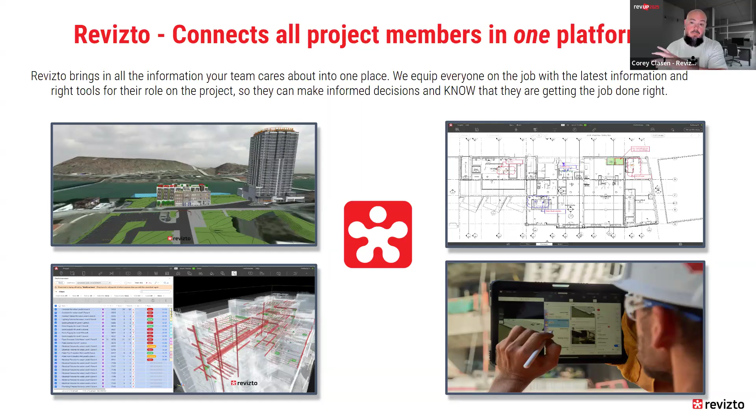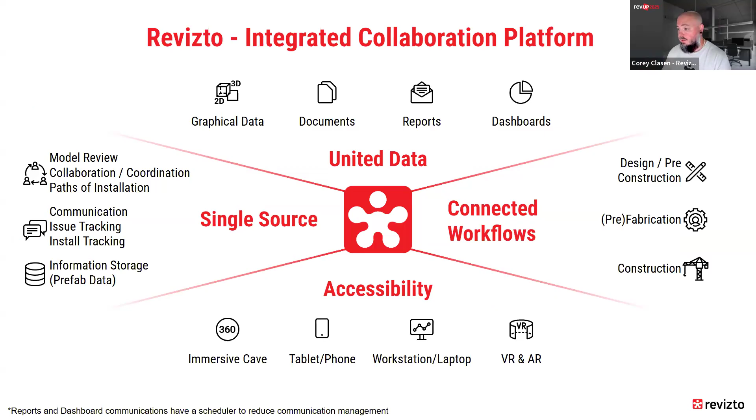All right, moving on. What is Revizto? Just a quick introduction for anybody who's not familiar. We are one platform that connects all project members into one platform: 2D drawings, 3D models, clash detection, field mobile apps. We're not just a BIM tool, we're a field tool as well. We play really well in that space and break down the barriers between your tech savvy folks and people who may not be so tech savvy, giving them an easy platform to use. We take all kinds of file types—we're software agnostic, meaning pretty much any software used for BIM and 3D construction right now, from an authoring side or even scans, we can accept and work with. As a holistic overview of where we fit into all of this: united data, single source, connected workflows, and accessibility. That's Revizto from an extremely high level.

And then Adam, if you want to run us through the high level of what Evolve is and what you guys are doing. Yeah, thanks. So pretty basic what Evolve is: we are a software company focused on the MEP trades. We started in 2018. Like I said, I'm an electrician by trade—I came out of the industry and started with Evolve as their electrical SME product manager.

We worked under the Applied Software umbrella, which was an Autodesk reseller. Around that time, we saw a significant gap in the trades as it related to the design process in Revit. A lot of people were still transitioning to Revit around that time. Some were early adopters, some not so much.

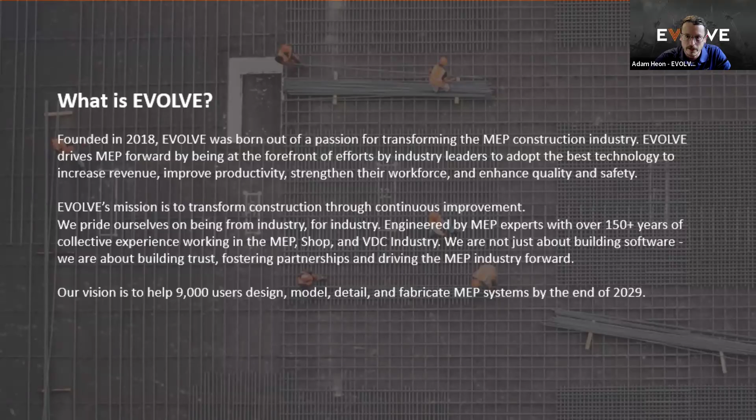So we saw the need, and basically what we did is we hit the road and traveled company to company across the country and talked to you guys and said, what are your problems and how can we help? And that's how we started. We just started solving problems based on what people were telling us.

Over the years, we grew. We've grown 30% year over year since then. Applied Software was acquired by Graitec, and Evolve broke out as our own company just a few years ago. So new endeavor at that point.

And yeah, so we have four basic products that are on the market: Evolve Electrical, which we'll be talking about today. Then we have our mechanical version focused on M&P. And then recently we've launched our Evolve Shop product. So we're kind of trying to be more holistic and not be just a point solution in Revit, but really do the end to end from design, fabrication to eventually field. So the shop product is kind of the next step for us.

360 Sync document management software. It's more heavily on the project management side of things, synchronizing things like Procore, ACC, could be Dropbox, Bluebeam, basically just document management. I think there's like 20 something integrations we have there.

And then also recently we launched our campaign, which we're calling VDC OS, which is just our web development side of things, focused on the VDC side of things. We're pushing out things like usage analytics, productivity measurements, various things like that, that basically enhance the VDC and help manage the VDC as a department. That's not necessarily just focused on the Revit environment. So yeah, that's basically a good overview of us.

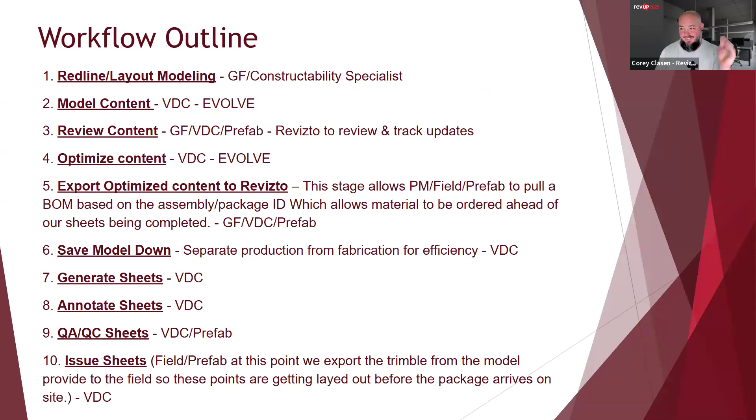Awesome. I advanced too soon on that one, but we're gonna go back and there you go. Made it right. Okay. All right.

So let's talk first about how does this whole thing begin, Matt? Like how do you guys get from starting point 0? What are you guys doing? Yeah, I'll let Adam go ahead and speak about the initial configuration, because this part is a critical piece. The very first step is how to configure Evolve.

Yeah, so this is an important part for us as well. This is critical for all Evolve users: understanding what needs to be set up, what's configurable, that type of thing. Like I said, we traveled across the country and talked to all kinds of companies, and everybody has a basic way of doing things. We're all building buildings, but there are always these nuances where your expertise lies, skill levels are different, company structures are different. So Evolve in general is very customizable. It can do a lot of different things.

But to what Matt's saying, getting that right setup is critical. So things like sheet setup, understanding your Revit standards, what view templates you use, what those outputs look like, what your schedules look like. Especially when you're talking about spooling and sheet creation, you have to establish those standards early on so that when you click that easy button, the output is what you want it to be.

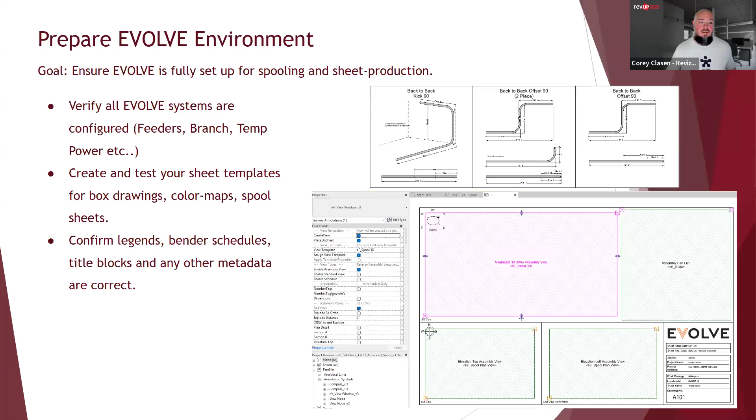All right, so we've got everything set up, we've had the conversations. Now what are we doing, Matt? Yeah, this is a basic concept that a lot of ECs, or even other contractors, are probably doing: once you have everything configured, you export your conduit run information schedule from Evolve, and then we mark it up in Bluebeam or whatever, do our layout, and embed our metadata to match the parameters of the spreadsheet,

so that when the constructability specialist finishes the layout, they embed the metadata that will then get imported. We export the CSV from Bluebeam, and then we import that directly into Evolve. So as you're modeling the content and you're finished modeling, you would then assign that metadata, or that BIM data, to each conduit.

Why is that? One of the things that I love about Evolve in this aspect is, we all kind of go through, you lay out this pretty conduit, you got everything routed and everything looks great. You go to coordination, and then, as an EC, I feel like we move a lot more than other trades. I might be biased, but at that point, you're then splicing, cutting, adding offsets, removing that BIM data.

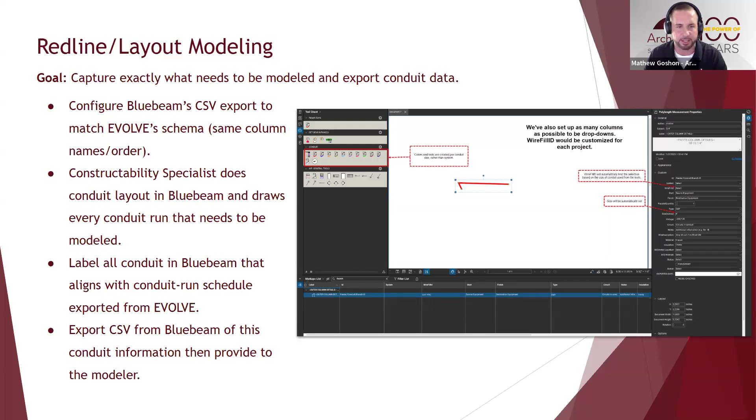Yes, sir. So we've got your parallel quantities, your to, your from, your sizes, your material, if it's EMT, RMC. That information is given to the modeler on the front end, which allows the constructability person to hold the modeler accountable, but it also helps the modeler to understand without having numerous questions or Teams calls. They have all the data they need on the front end to be successful. Yeah. All right, cool. Thanks, Matt.

All right. So then from there, we're going to model red lines. Yes, sir. So a lot of people, when they think of Evolve, they think it's a prefab and spooling tool, which would be correct, but it also has other tools that allow you to be more efficient in other aspects besides just spooling. One of those would be the modeling. I'll show the two examples right here.

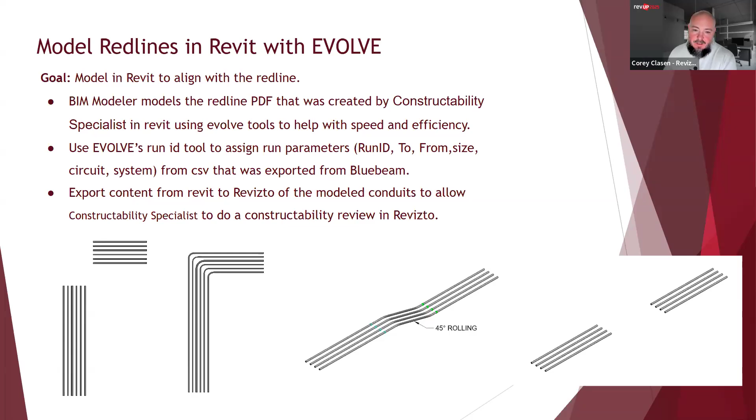Yes, sir. All right, so now we got everything modeled, right? Now we're starting to talk about constructability review. Who's involved at this step, and why is this so important for you guys? Yeah, first off, I'm gonna go through the process, but really, we all know as a modeler, it's your job to QA/QC your own work first, obviously.

So I'm not gonna go through that process because we all should be checking our own content before we say it's ready to be reviewed. So once it's ready to be reviewed and you've told the constructability specialist, basically, they're gonna go ahead and we're pushing this content to Revizto.

So if I want a clash to go automatically, every clash should go to this person, and then this BIM manager is going to assign it to his team to resolve the clashes. Well, you can set on the stamp that this type of issue will automatically be assigned to this user. We'll add these 5 watchers because they might not be the person that are fixing the problem, but they need to have visibility to be aware that there is a problem out there.

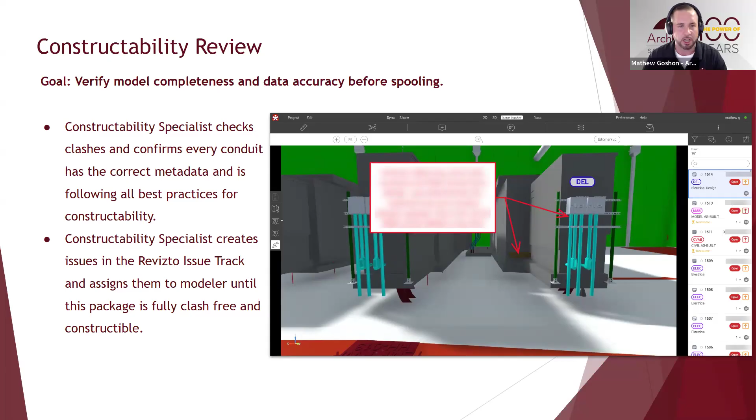But then you're correct. Once you get to the modeling, it might be buildable, but that doesn't mean it's the best solution for prefab, or it makes the most sense in saving labor hours in the field. So that constructability specialist is an expert in the field that then understands the BIM tools and workflows to allow us to get it right the first time. Very cool. Makes sense.

All right, so now we've done the review. We're all good to go. We've got sign off, buy-in. Now we're gonna optimize. Yes, sir. So what is spooling to me? Well, spooling is basically, when you model content in Revit, you might have a straight that's 500 feet. Well, that is not the information we want to be able to have. Evolve has allowed adding couplings.

So we might have a run, and then you will optimize that run and add couplings or unions, however they call it. Then you're taking that stick of conduit that really can't be purchased from anywhere, and you're breaking it down to a bill of material where you can say, I know I need five 10-foot sticks or whatever. And you start seeing the real prefab materials that allow everyone to understand the quantities and everything related to it. So that's kind of what the spooling is.

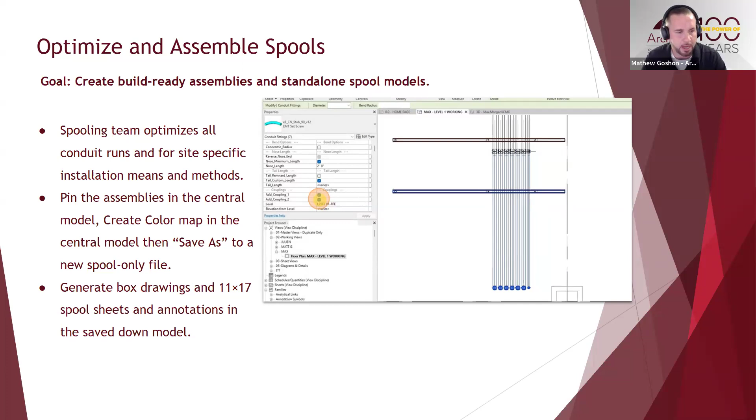You're taking Revit content and breaking it down to actually being able to utilize that information further in the prefab or in the field. One thing that's been a lesson learned is just understanding you might be spooling overhead, and let's say you're spooling EMT. Well, when it comes to spooling RMC, there's different ways, because when you're spooling RMC, the coupling comes as part of that 10-foot stick, it's all one piece. On a 10-foot stick of EMT, it's actually 10 foot.

So you just got to make sure you're looking at the product data of what prefab is going to use, so that when you go to optimize and add the unions and start looking at the information, what you're doing is aligning with what prefab's ordering and has on hand. That's one of the biggest things I would say to pay attention to as you're spooling different types of material: understand what you're actually getting on the front end.

And then, what is a spool? We keep saying this word. Well, it's an assembly. Revit calls it an assembly. So basically after you've optimized your content, you would then optimize your bends. When you optimize a bend, you're allowing the information, so when we generate a sheet, it'll pre-populate the Mark 1, all the different information of how to bend the conduit or the offset or whatever type of bend it is.

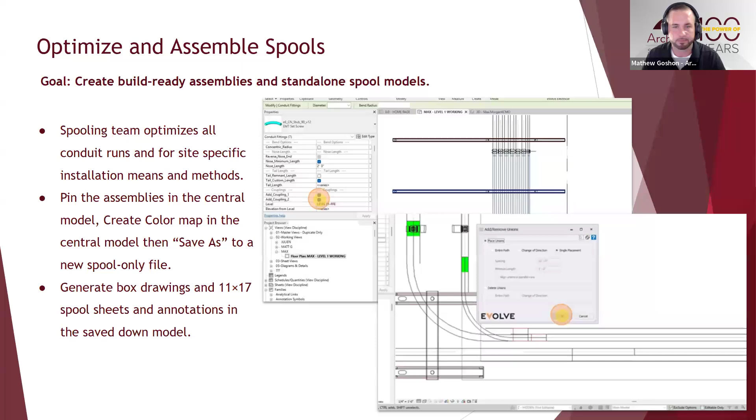So from that point, how are you guys moving this into installation, material delivery, that type of thing? Yeah, so while the sheet is being annotated and built, really what's going on is we've already exported - we've already spooled, pinned our content, we already have all our assemblies, and we've already exported to Revizto.

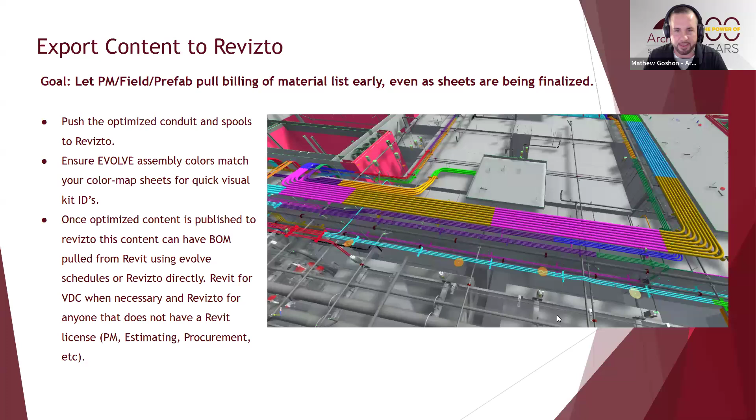While the sheet is being created, obviously the VDC team can pull a schedule or a BOM straight from Revit, but while we're working on the sheets, the prefab field team or project management team can come into Revizto, and based on the assembly information - you can see on the screen right there where we're using the selection inspector - they're able to come into Revizto themselves, pull the information directly from Revizto, and export a CSV.

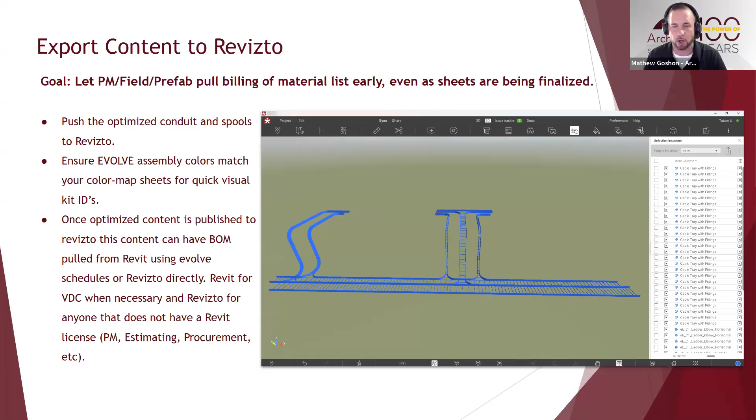So this is really showcasing the efficiency. You're not waiting for the sheet to start your ordering of material - modeling's done, we're just working on annotating sheets. So you're not waiting for one step to complete, you're simultaneously able to do two steps. They're ordering the material while you're finishing the sheet, so they have the material in the warehouse by the time you complete the sheet.

Yeah, I think this is really important. A lot of my communications with the field when I was sitting in the coordination office was, hey, I need a quantity, I need a takeoff, I need this, that, the other thing. Really being able to set this up for your project team and just showing them a couple button clicks to say, hey, you can pull this yourself. So that's so valuable to have, especially for somebody who's heads down trying to model or annotate or do all this other stuff.

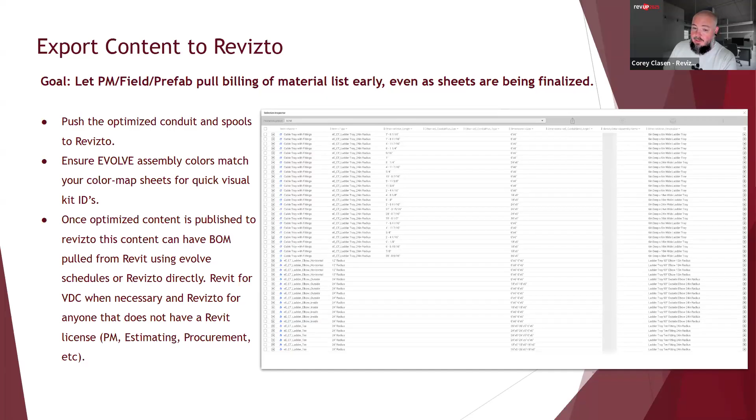Just those short interruptions can really mess up their work. And not everybody uses this, but more and more people are finding this to be a really reliable way for them to get the information they need, just for a quick back check to make sure that their bulk buys were good, or whatever the case may be. So this is a really good use, and I'm happy to hear that you guys are being successful with this side of it.

So then from there, we're going to move it into the nuts and bolts, the down and dirty, right? We've done all this stuff, now we just need to do the annotation of the sheets. Then we're going to QA/QC them. This is just leaders and cleaning up the sheet to make sure it looks pretty, the typical stuff, just so that there's nothing confusing. If there's something missing, you'll have them say, hey, I need a dimension here, or whatever the case may be.

Exactly. Anything else that I missed on this one? No, mostly it's there's information the field and prefab team have to have. So when you're creating a package, one of the last data centers we were working on, we had about 4,000 sheets to complete the whole building. You have a ton of sheets your annotators and detailers are going through, and they're annotating, they might miss something. They might forget a dimension, or the tag isn't there, or something like that.

So we're just making sure, because a lot of times when the prefab team is running like a manufacturing group, they're just spitting out content, building stuff. You don't want to get to a point where they're calling you because the process is at a halt, since they don't have a dimension or they don't have a tag. So doing the QA/QC just makes sure all the content that prefab needs, they have.

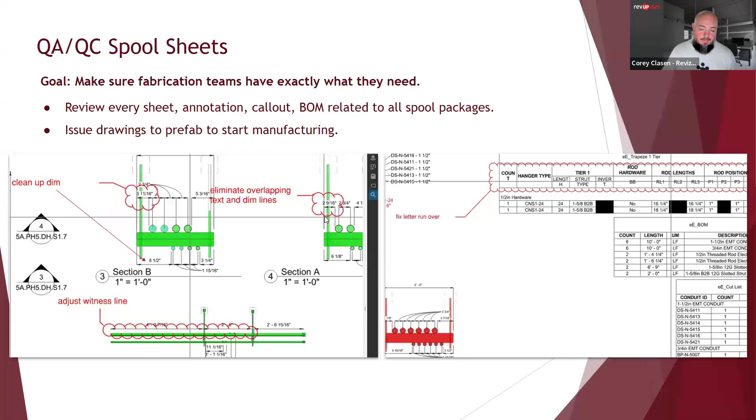Gotcha. Yeah, prefab and field, right? Because it looks like, sir, this is BOM over here for fab, and then on the left would be this type of overlap measurements for install, right? Yes, sir. Awesome.

All right, so I guess we're leveraging Revizto again at this point, right? And where does this fall into your guys' scheme, and how are you guys setting this up and using this? Yeah, so right here is where we're looking at the color map. Like I said, this color map is then created in the central model. It can then be pushed to Revizto. It has the metadata behind the location, which is amazing.

So you can see the little house in the corner of the sheet. What's really going on is once the sheet is pushed to Revizto, you can then go to the 2D area of Revizto, click the house in the left-hand corner, and it'll lay the sheet exactly where the sheet exists in the model, which you can see in the picture above. This is a great feature. It allows a lot of context between sheets.

You can do this also with engineer sets of models or sheets, which allows, you might be having mechanical equipment that you need to power or different things. You want to make sure you can overlay their sheet, the mechanical drawing, onto the electrical or onto our model. We can make sure we have a conduit that's going to provide power.

And I really like how you have this set up using the baked in information from Evolve, right, with the package IDs that you guys are using. Yes, sir, not only using this as a way to visualize things, but you're actually taking Evolve property information and pulling that forward into making it more understandable for the field, right? Yeah.

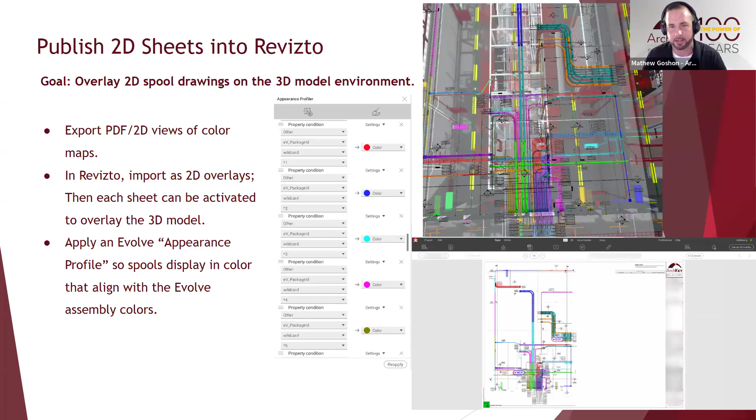If I'm not mistaken, this is a newer feature to Evolve, Adam, I don't know when this came out. Enhanced feature. Okay, cool. Yes, so Matt, let's run through this and talk about it.

Previously I was a big Autodesk Point Layout person. There were some features they had that were great. Now Evolve with their new update, we're utilizing Evolve strictly for Trimble. It's great, they have all the same features, if not more now. So they've really updated the tool to make it just another license I don't need to worry about assigning. A pain point was you'd have to assign a license. We might only have 3 APL licenses. Well, everybody has Evolve, we all can Trimble, we can all export Trimble.

I'll go through one of the biggest things: nesting points. This isn't a new idea, but you can nest your Evolve points in your families, in your vaults, your ground rods, your test wells, your hangers, your supplemental steel. Then as the modeler models that content, it's auto-trimbling because it's nested inside the family. Then you just go through and label your nested points, which you can see on the screen. We're in the point manager labeling the nested points.

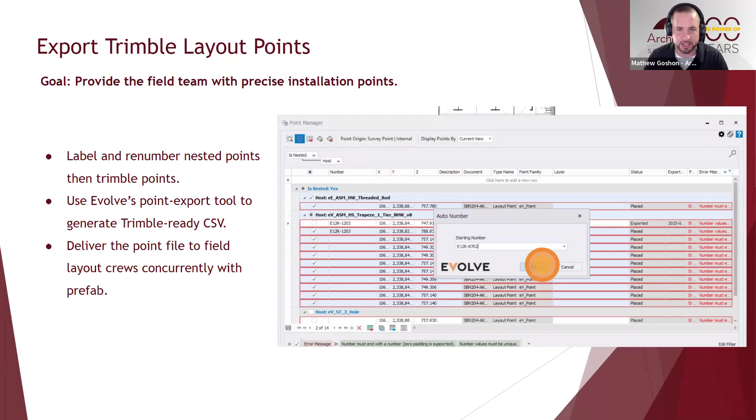Awesome, so we've gone through all of this, we've gotten all the way to here, right? Now we've got the install fab kits on site, right? So this is the end product. Checking this out, so walk me through this.

Yeah, so this is basically, when it comes to underground, I'm not spooling as much, but these underground racks are critical. This is where you're stubbing up either in the building, into gear, into equipment. You want to reduce the labor hours, this is a time consumer. Being able to model all of the content, spool the content, the rack, you can see the dimensions match the rack. The dimensions for the conduit are blue. So we've tried to make it look pretty easy.

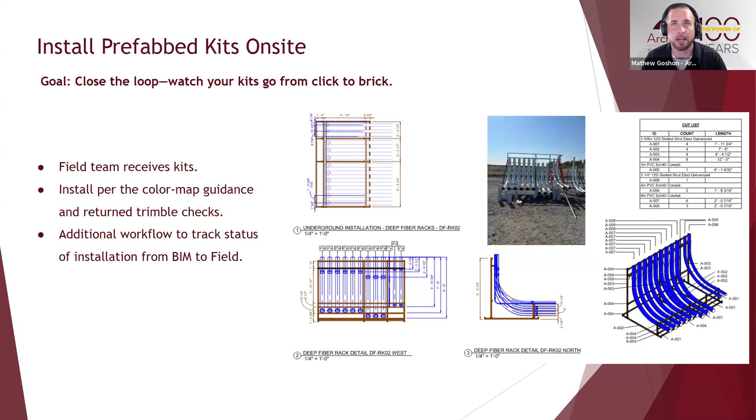Okay, if it's a blue dimension, it's for the conduit. And then you can see in the picture, the conduit and everything's matching the drawing. And then this is just another example where you have all the conduit labeled. You got the rack itself on the right-hand side of detail 4. Well, you look at the cut list, those numbers tell you exactly what to cut, how to build the rack. This allows prefab to have this done ahead of time.

So then when the ditch gets open, they drop the rack, which has the nested Trimble points like we were just talking about, which has 4 corners and the centers of the conduit. So you're already dropping it and then you're ready to install. Matt, are those racks standard, like families that you guys built? Kind of drag and drop parametric things?

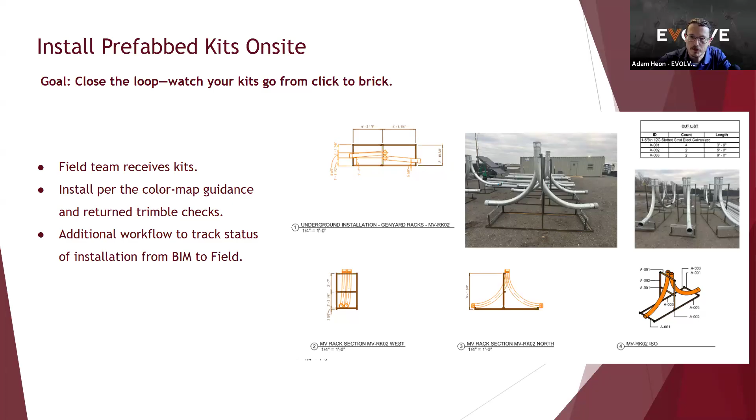Yeah, that's a great question. That is one thing that has been huge. Evolve has a library that allows us to go from job to job to job and look at a bill of material or a cut list or whatever, and they have the same Evolve descriptions. Like this rack right here, the hangers, any of the content you're modeling and spooling, you have this Evolve family browser that has all this content. So you already are standardizing and you don't even realize it.

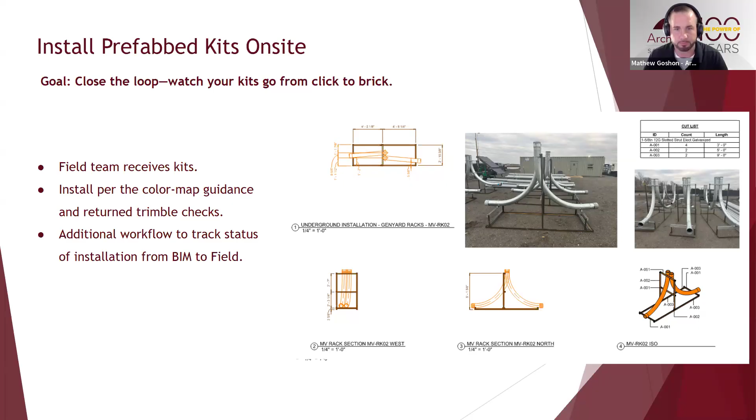Yeah, that's awesome. Very cool stuff. And then so from BIM to install, right? Like that's what we really want. That's what we're going for, right? And this is just an amazing example of a very complex, well, maybe not complex, but very congested area, with an absolute ton of different conduits and things. So this is really an impressive feat to come from start to finish.

From click to brick. I like that. Yeah. Yes, from click to brick. I love that actually. That's really good. Really good.

Yeah. It's satisfying also just being able to see as you're modeling and then you see the end result, and you're able to go out there, you can scan the AR with Revizto and you can see your content is actually lining up in the model, and you're reducing labor hours in the field, which is the goal.